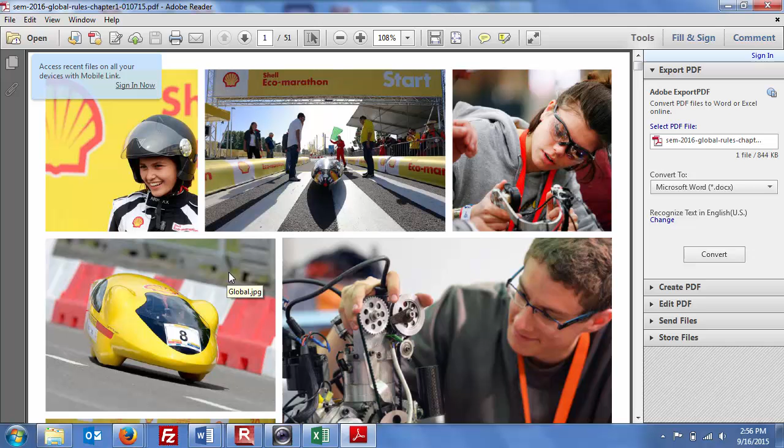So the way this typically breaks down is, obviously the car is comprised of multiple components, multiple systems, and what we typically try to do is assign a student to each component. Like someone's going to be on the drivetrain, someone else on the steering, someone on the brakes, someone on the body, someone on the frame. And that's really how any auto manufacturing facility works as well. Someone's doing the tires, someone else is doing the paint. So the rules tend to break down in a similar fashion.

So these are the global rules. These are the rules that all teams have to follow. We've not been... oh, so show me.

Yeah, so London is where the European, Asian, American champions are. So if you win the Asian or the American competition, then London is where the final competition is. So again, they're in Detroit, Michigan. Oh, pretty cool, the Philippines, in Manila. That's kind of cool.

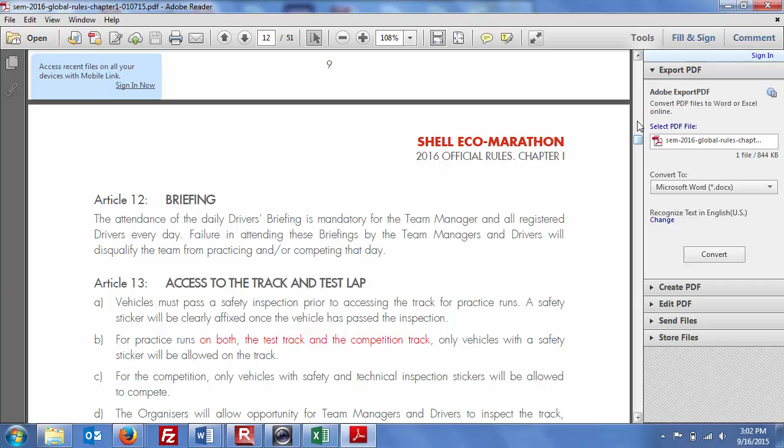All right, let's look at some of the things that can be deal breakers on this.

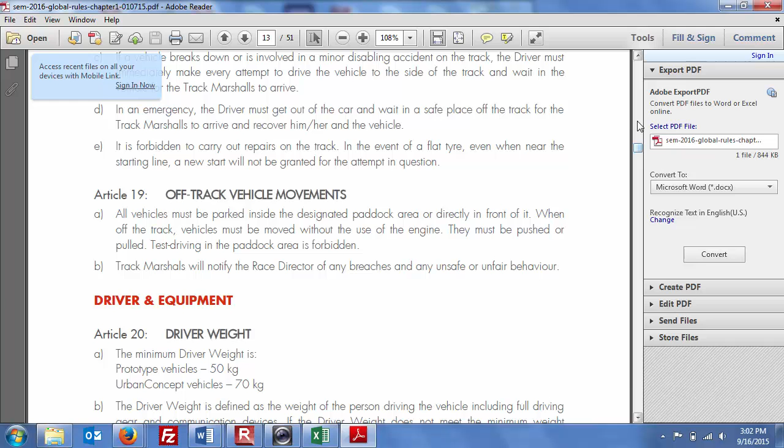So the weight of the driver obviously is an issue. A lighter person in general, like 70 kilograms. I think I weigh about 90, so I'd be kind of on the heavy side. But if you don't weigh enough, they stick a ballast in there so everyone's got at least the same driver weight.

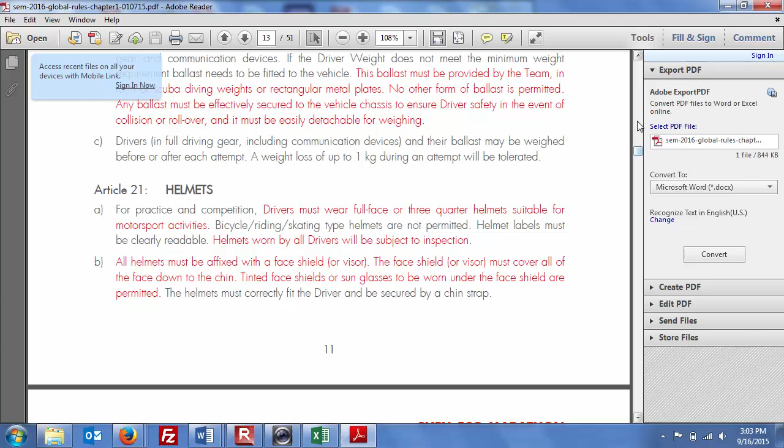So there's helmets, face shield, racing suit, driver comfort. Not as big a deal in Detroit, it's not as hot as Houston obviously, but good to stay hydrated.

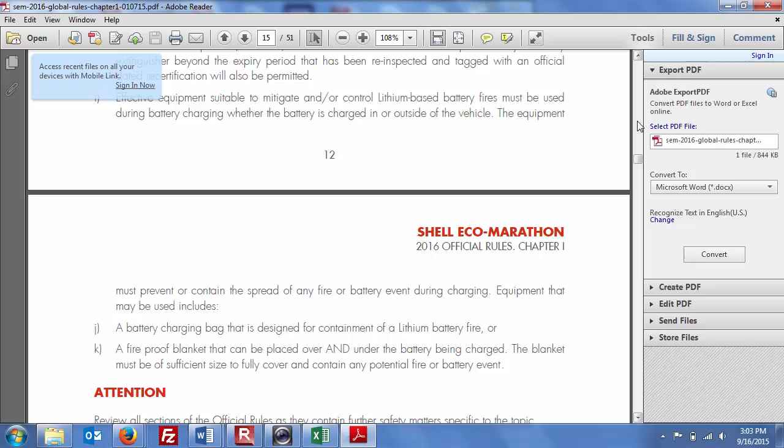Tools, materials, fire extinguisher, battery charging bag in case your lithium battery catches fire, fireproof blanket. They are really big on safety, and I don't think they've had any problems. I've seen a few wrecks, and they can be a little dramatic, but I've never witnessed an injury or heard of one.

So exactly 4 wheels, that's where we are. And we've got a 4-wheel vehicle, and the frame's actually sitting out in the bullpen. We should go check it out after class here.

Continuous contact with the road. You can't stick a sail, you can't have a sail in the car, more or less. They're pretty serious about the safety, just nothing too sharp, that's your minimum radius. And this can be a deal breaker too, having something that might look safe, but if that radius is too pointy, I don't want a spear on the vehicle either.

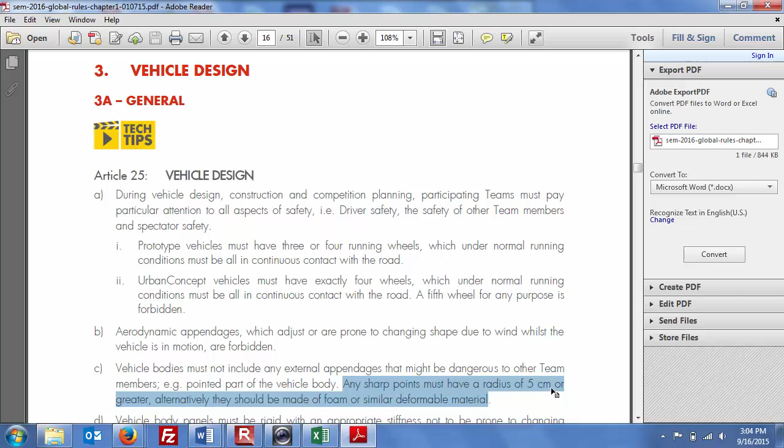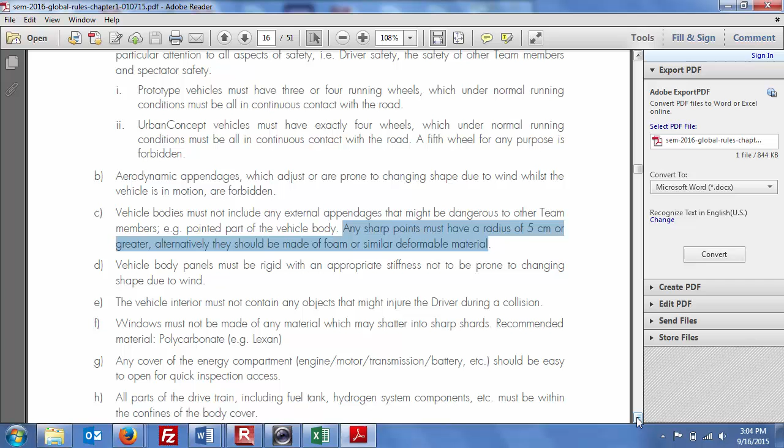Energy compartment should be easy to open. Solid floor, that's a big deal as well, fully covered. So I'm not even sure our vehicle from 2012 would qualify, it was pretty open, as you saw there.

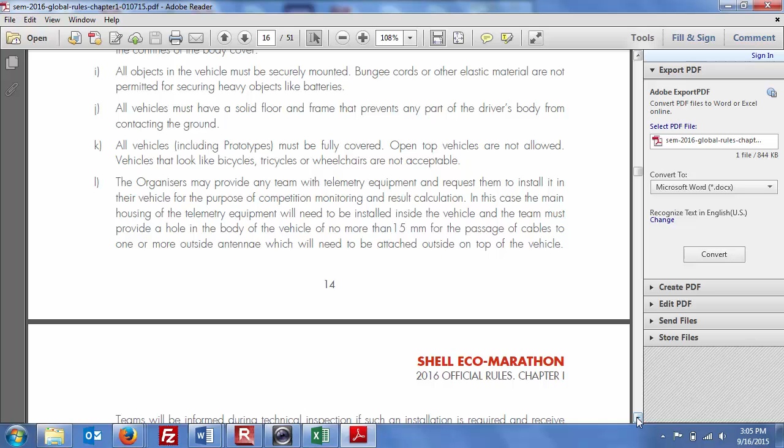The monocoque frame means that it's like a shell rather than tubing. Back in the days of bicycle building, some of the first monocoque bicycle frames came out where rather than welding tubing together, they just had a single carbon fiber frame done all in one layup, so it's just one piece rather than having any seams. That's what that is.

We do not have a monocoque design, so. Roll bar, I think we're all set for that. We should go check it out.

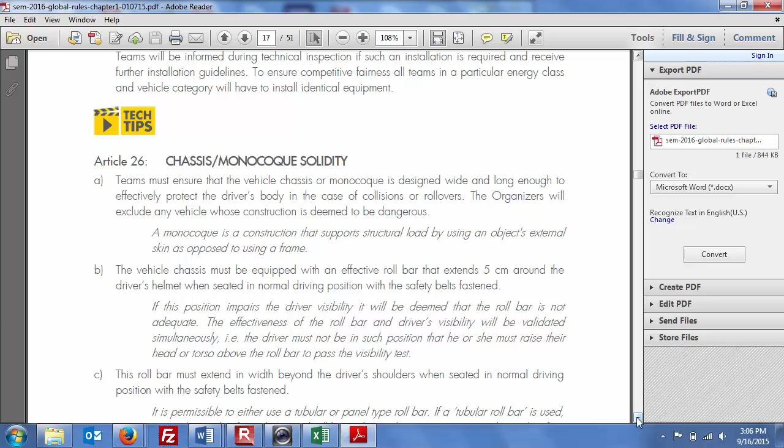Static load, 70 kilograms. They'll hang something on there to make sure the thing doesn't bend in on you.

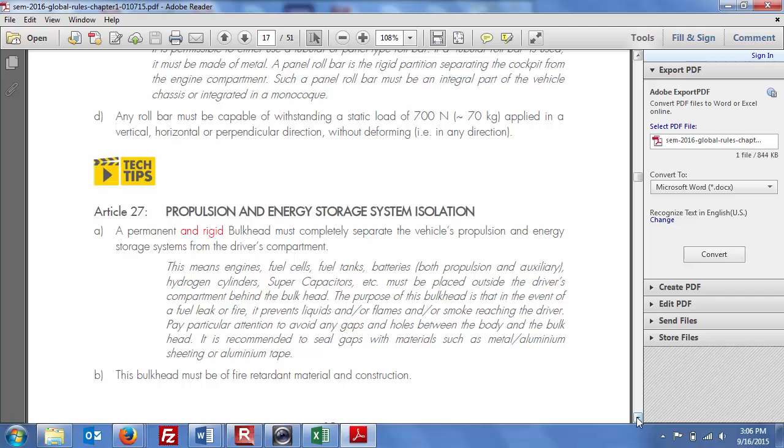This is a big deal, the bulkhead, just so that the driver is safe from the moving parts of the transmission, etc. It also has to be fire retardant.

This is a big deal too, that you can sit in there and see out easily.

And I think probably the next thing for us to do would just be to take these rules, stick them into an Excel spreadsheet, and just check them off when they're done. And if they're not, just leave them open until they are. I think that's a good verification step to do. Always update the flow chart. Yeah, exactly.

Technical inspection, weather visibility. Jake actually mentioned he would be willing to work on the windshield wipers. He put some time in on that last season, so we can hit him up for that again.

Safety harness, five-point mounting. We have a lot of this equipment already that we can cannibalize from previous cars.

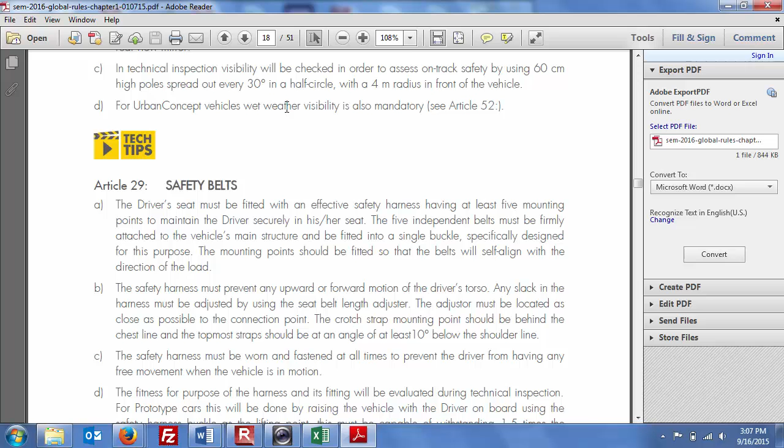Urban concept, prototype.

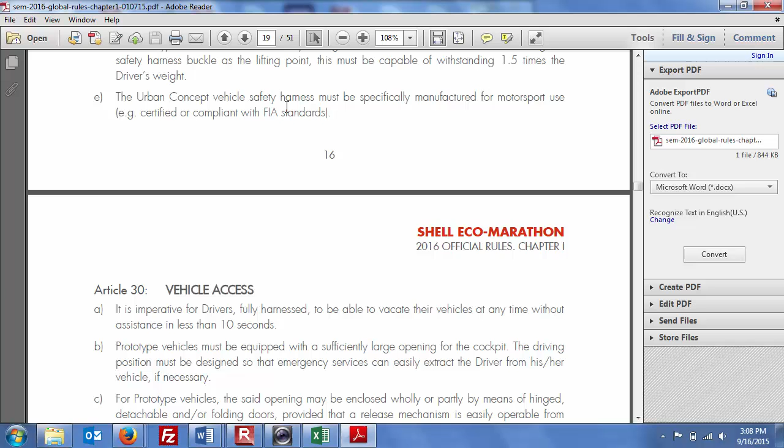Emergency services, hinged attachment—prototype's not a big deal for us. For urban concept vehicles, the opening and release mechanism must be easily, intuitively operable from the inside and outside of the vehicle. We had a pretty good set of doors last year, and we can replicate that.

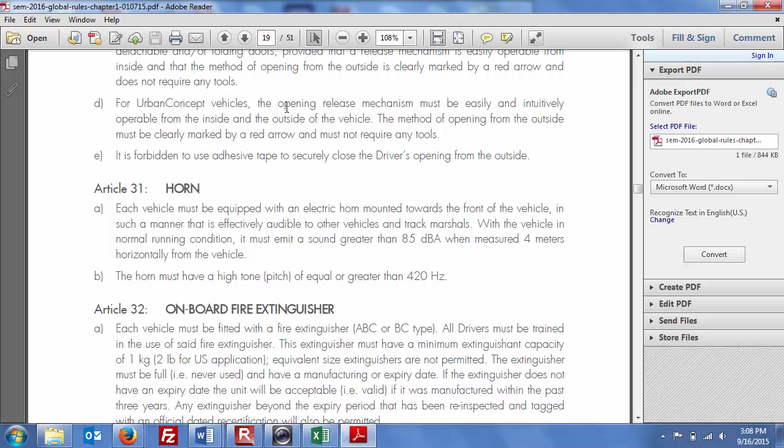Red arrow, got to have a horn, has to be loud. Onboard fire extinguisher.

Driver position: when you sit in there, you can't be squished up against the top. This does not apply to our electric vehicle, but you can't have a thing that's always moving or always running.

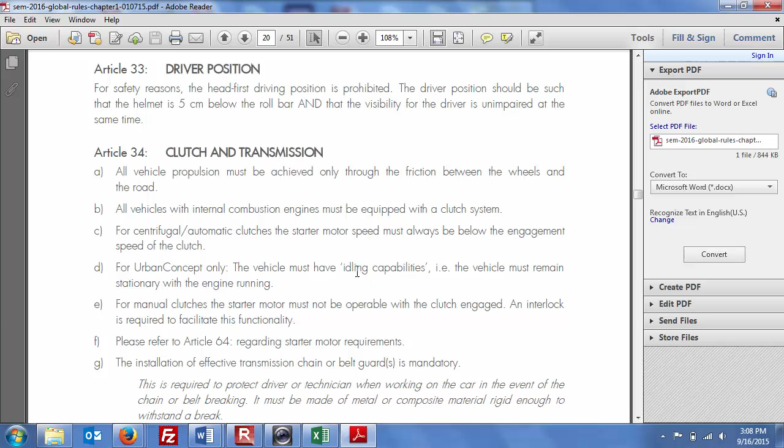That's the exhaust, not a big deal for us. You can't be too loud. There actually is a compressed natural gas category too, kind of cool.

So battery electric vehicles must provide a physical isolation with the propulsion battery from the vehicle system, like a normally open contact type.

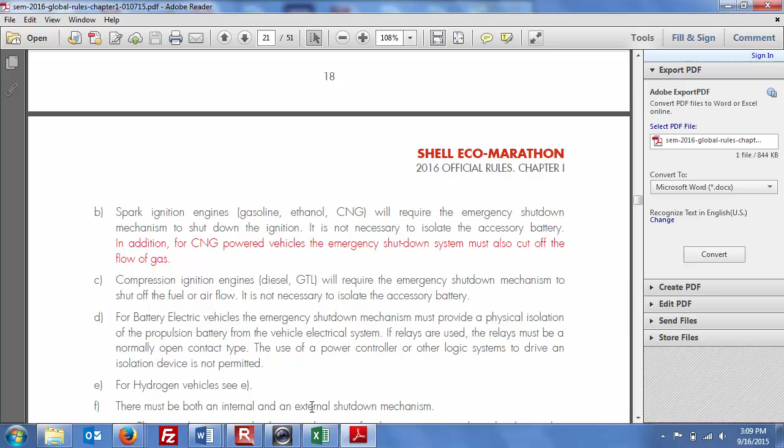Internally, so if the driver can shut it down, or if the driver is incapacitated for whatever reason, it can be shut down from the outside—again, dead man switch, directly.

So this is kind of new: it's a switch in series with the accelerator. In addition to moving the accelerator, you have to have this button on the whole time, and if you take it off, it's like a lawnmower—that little lever you might see in a lawnmower. Sometimes if you let go, the thing dies.

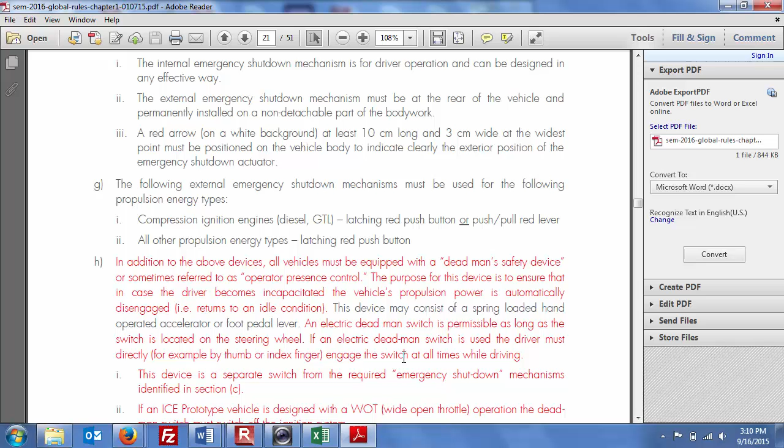Okay, so here are the dimensions—that's for prototypes, so we can just kind of skip through that.

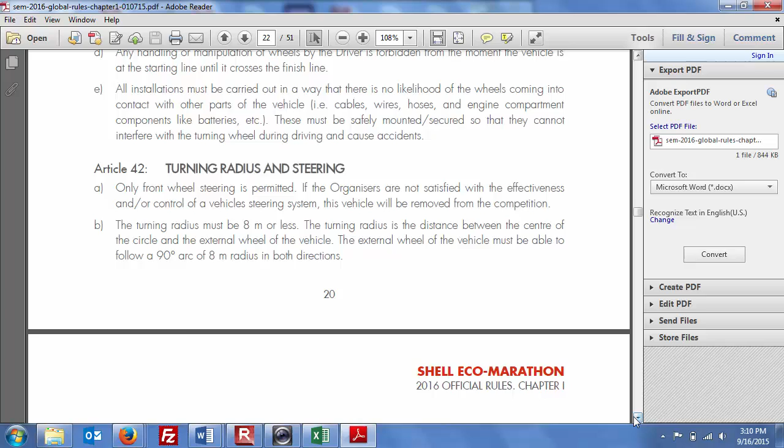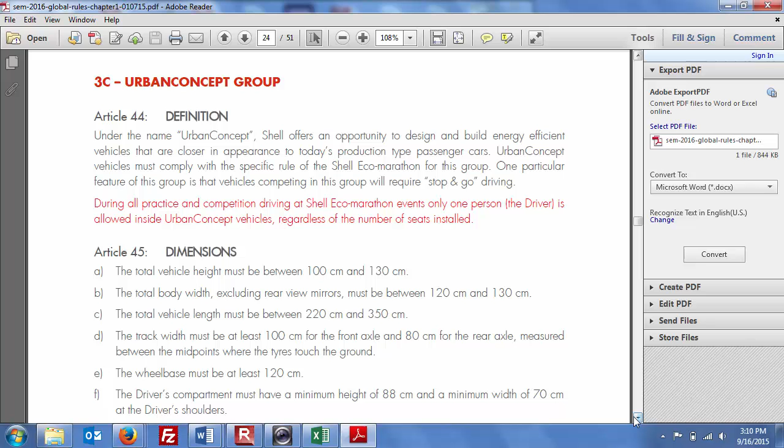Braking. Here's urban concept: you got to be at least a meter tall and not more than 1.3 meters tall. There's the width, there's the length, the track width, the wheelbase. We'll go out and make sure all of our dimensions are correct.

You can't be too low, you can't be too heavy. Just talked to Jake—he said the frame is super light. He's really impressed with it.

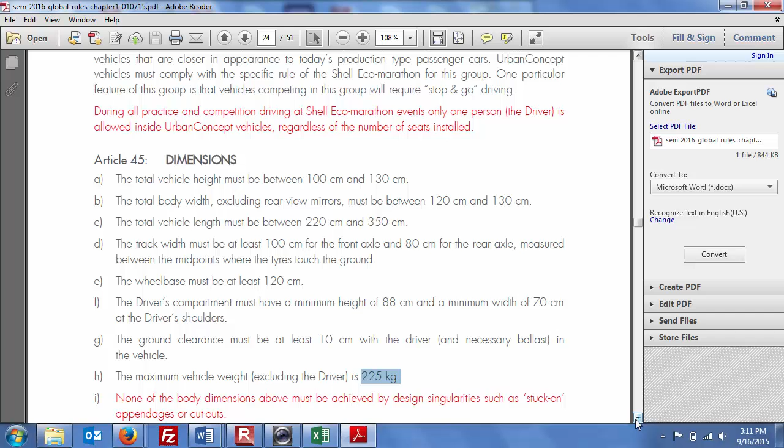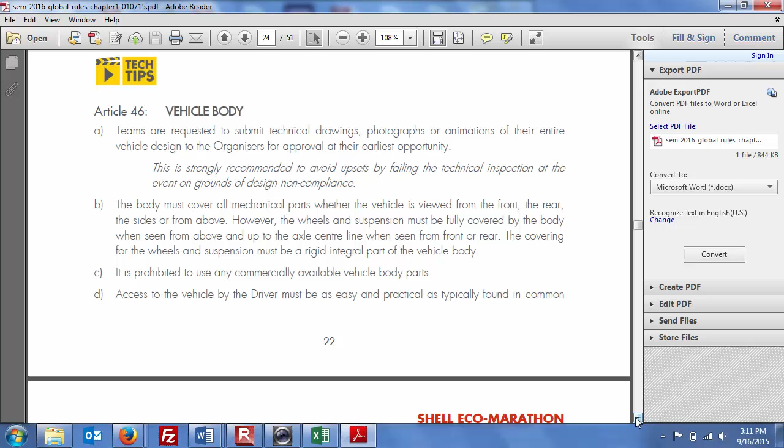Vehicle body. Windscreen with wipers, got to have a little luggage space, not too big. The luggage must be supplied and be in place—it could just be a milk jug or something like that.

Towing hook or ring, you have to have that. The wheel cannot be too large, or sorry, too small.

Turning radius 6 meters or less. That's actually pretty generous—that's a pretty big, that's 18 feet. That's turning around in a 36-foot wide road.

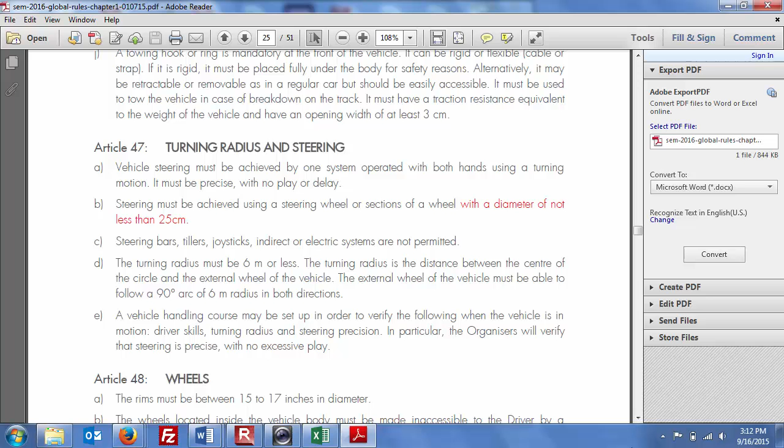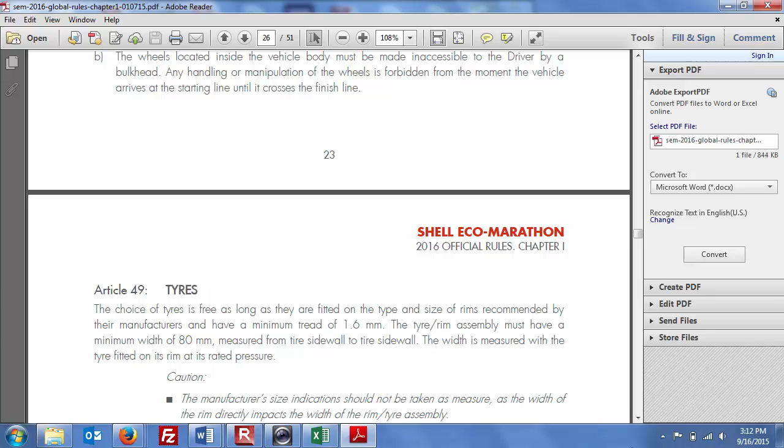The wheels cannot be too big or too small, and we do have some wheels—we have to make sure they're appropriate. Driver cannot touch the wheels. The tires have a certain dimension as well.

Lighting—this is very important too. If you fail any of these tests, you can't go on the road.

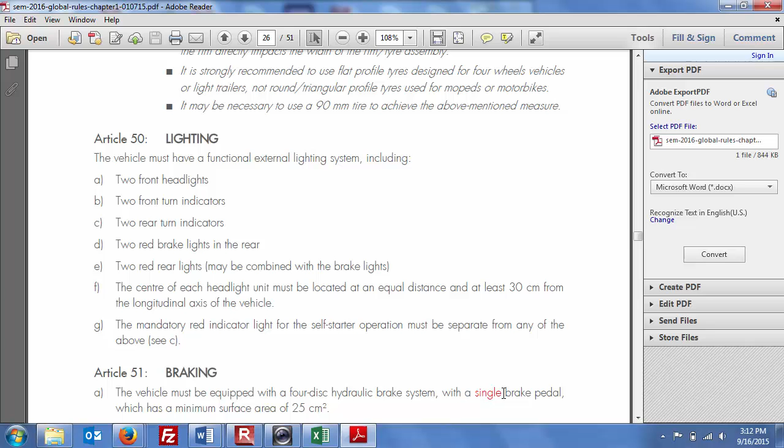Single brake pedal, you have to have 4 hydraulic disc brakes, and we do have those on hand. Master cylinder, brake system, parking brake.

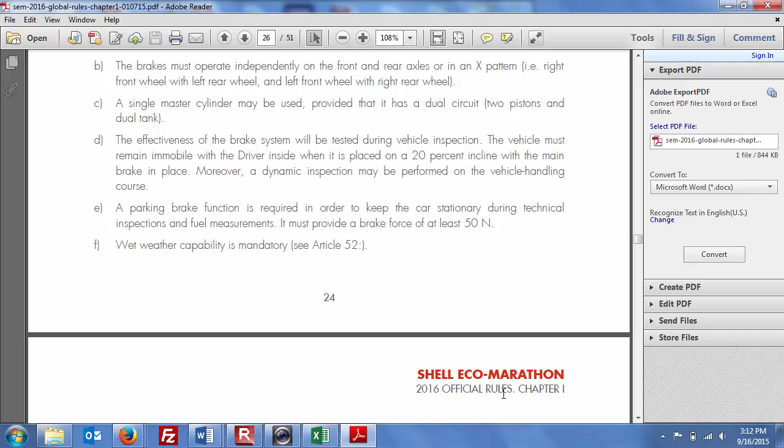So yeah, I think the next step is to get this into one spreadsheet and just start checking the boxes.

All right, so we're not doing any combustion, we're going battery electric. Maybe down the road sometime we do a hydrogen—we do have a hydrogen fuel cell, but it's big and bulky and made for stationary use. Just don't have anything of that small size, but that'd be a fun challenge down the road.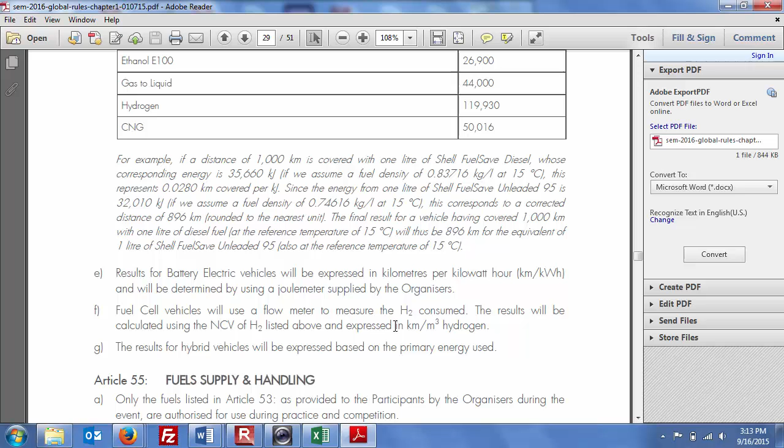So here are kilometers per kilowatt hour. I said a second ago you might do kilometers per megajoule, but you can just do the same conversion there. And the joule meter is provided, as I mentioned before. In the case of hydrogen, they're using flow cell meters or flow meters.

48 volts, that's where we are. More voltage is better for getting off the line quicker, a little more torque, starting torque in general.

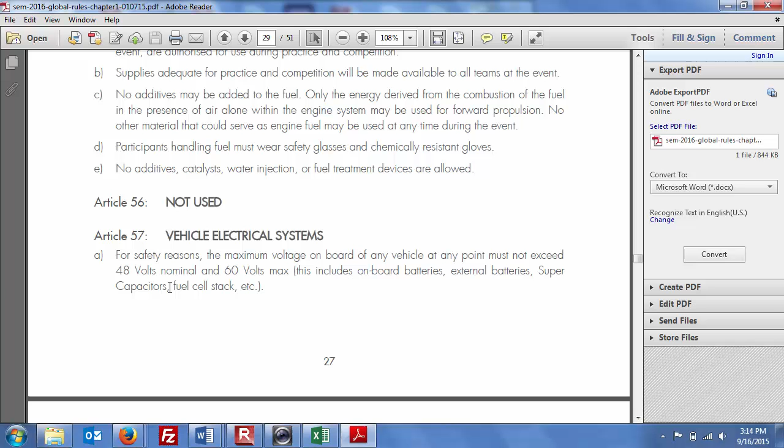We are allowed to use capacitors as well. I think one of the students mentioned he might have some capacitors we could use. We do have 2 different sets of lithium-ion batteries that we can use as well, and a battery management system.

And we'll get into this in more detail. Metal tray is required—I think we had something wooden last time, but obviously have to go with metal.

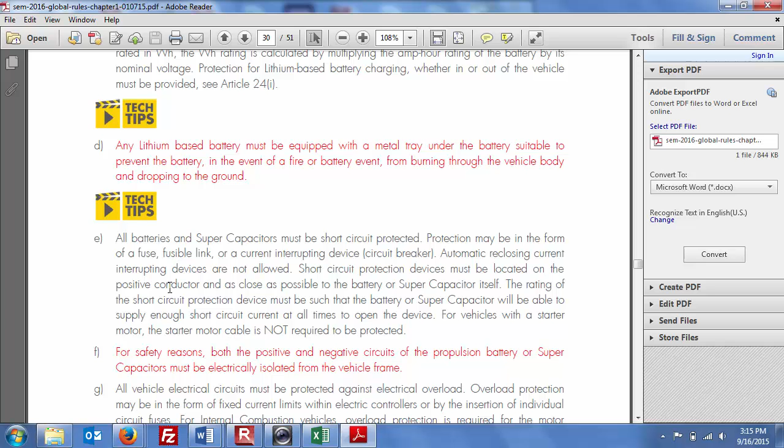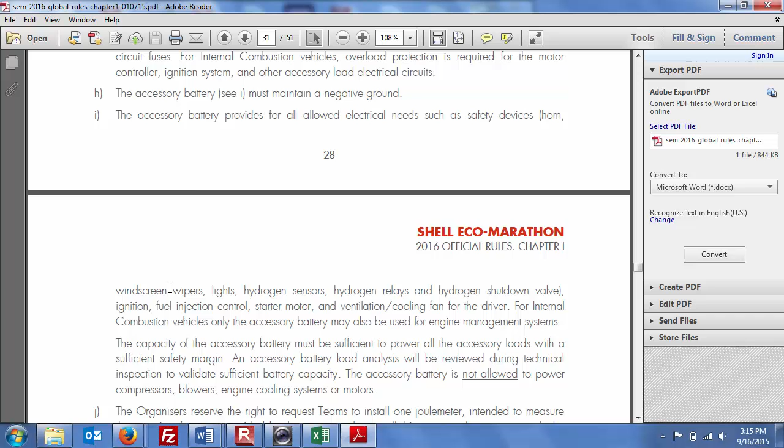We'll need to get, and we do have a good start on our technical documents. We've got last year's report that's pretty far along that we can buff out and put in.

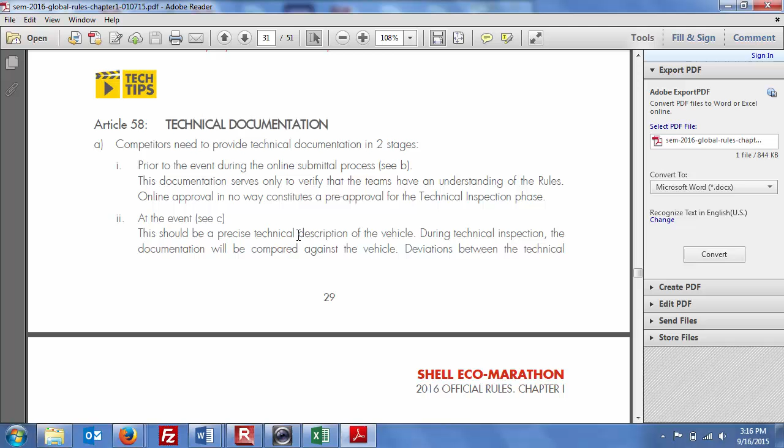And this is how energy flows through the car—battery electric. This is going to be our main electrical wiring diagram, and I think Colton had a really good start on that, so we can just use that and go from there.

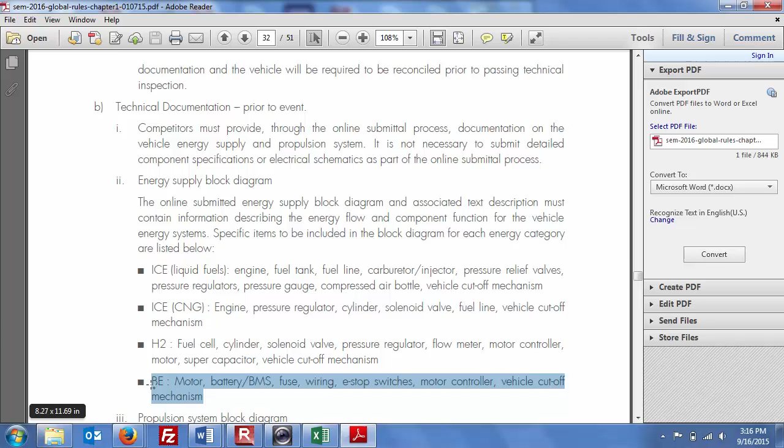Same thing on the propulsion block diagram, how energy flows through the system. Battery electric, so we need each of these separate wiring diagrams—not a big deal.

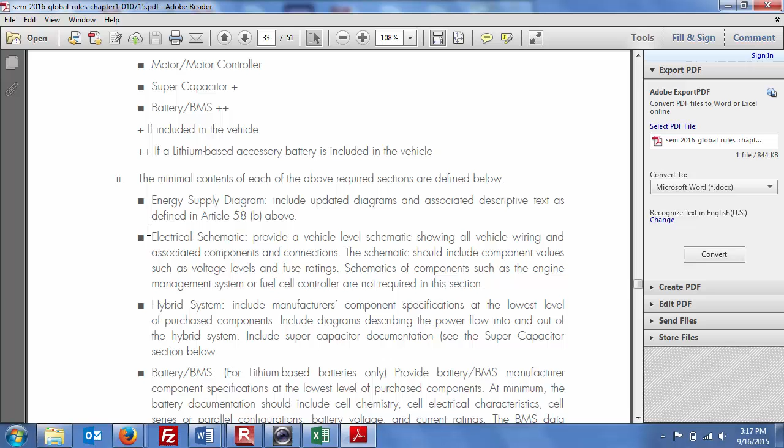I have to just provide all the specs on what we have for the batteries and the battery management system. Fuel cells, supercapacitors, motor controllers.

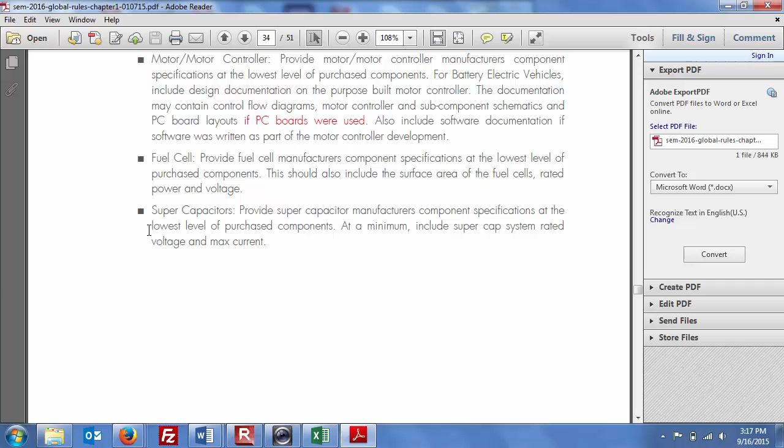Okay, so this internal combustion does not apply to us. Fuel tanks does not, fuel system does not. Hybrid technology - we have not really decided whether or not we're going to use a capacitor. Like I said, one of the team members for this year said he has access to these, and it might turn out to be to our advantage.

You cannot store energy mechanically or hydraulically, only electrically. And so if you're storing... well, I guess a capacitor in addition to the battery would be your stored energy, obviously, because you have to start with the battery on board.

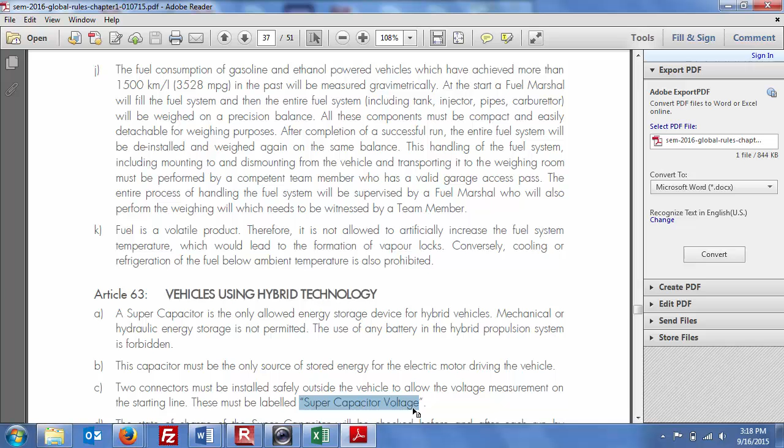Oh, and I think they want you to label this too, because the capacitor obviously can discharge much more quickly than a battery, so you can get a much bigger zap in a hurry from a capacitor than you could from a battery potentially.

And they want to make sure that the supercapacitor is not charged at the beginning of the race. It's just for on-board running time storage and maintenance.

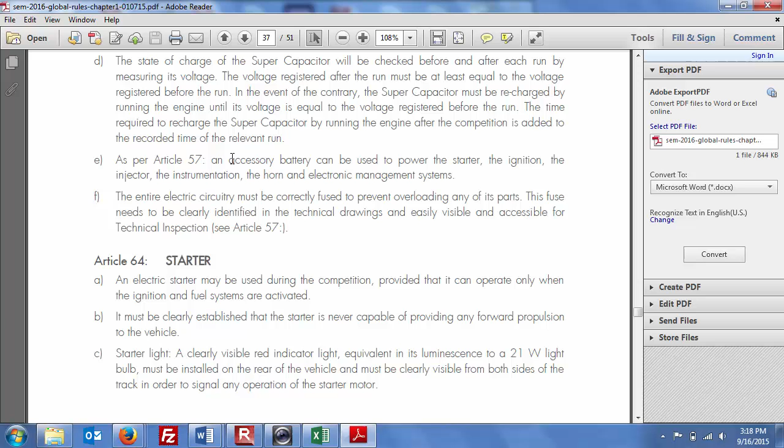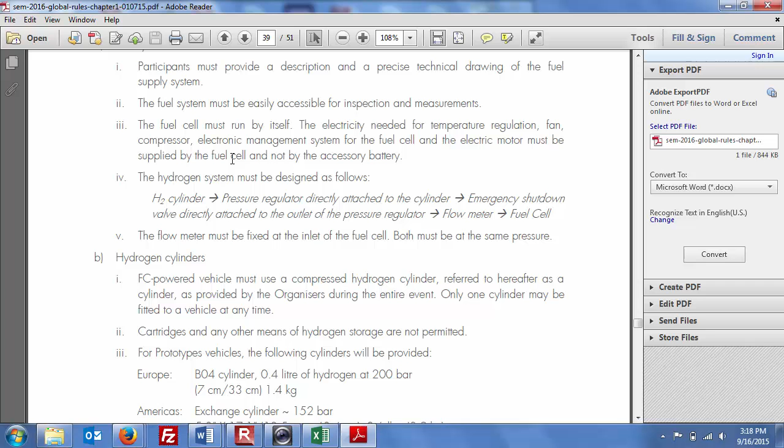Starter, it's for ignition, electric propulsion, fuel cells, hydrogen cylinders, ventilation, hydrogen detector.

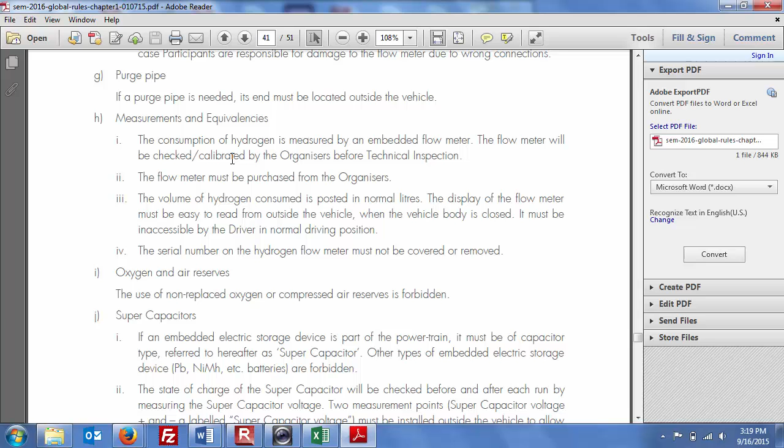Wiring clearly distinguished - this is a pretty big deal, making sure that the wiring is neat. We've always done a pretty good job with that in the past. You've got your propulsion power and your accessory power, and obviously a lot more juice flowing through the propulsion than the accessories.

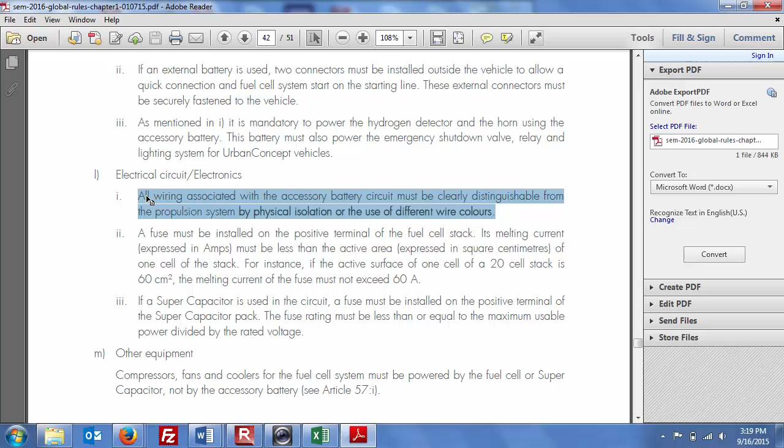Fuse. Different colored zip ties - yeah, different colored zip ties would be fine too.

You can have up to 2 electric motors. We've got multiple motors, we've gone through a bunch of different iterations. It's amazing how hard it is to find a motor of the appropriate size and RPMs, but we do have a good selection.

Modifications - okay, so the motor controller must be purpose-built for the Shell Eco Marathon, and this is a tough one. The electric motors may be purchased or purpose-built, but the motor controller must be. So we have to build our own motor controller.

There's been a few cases in the past where if a team buys a motor controller and does a slight modification to it, they allowed it. But this is the new deal - that's not allowable anymore. So we'll just have to see where we are.

That's going to be one of our more challenging builds. So motor controllers built from subcomponents - here's an opportunity for a little bit of reverse engineering, because we do have a couple purchased motor controllers, and it's basically going to come down to seeing what's in there and then more or less recreating it. Probably not as sophisticated as a commercial one, but if you're using other subcomponents, then it's fine.

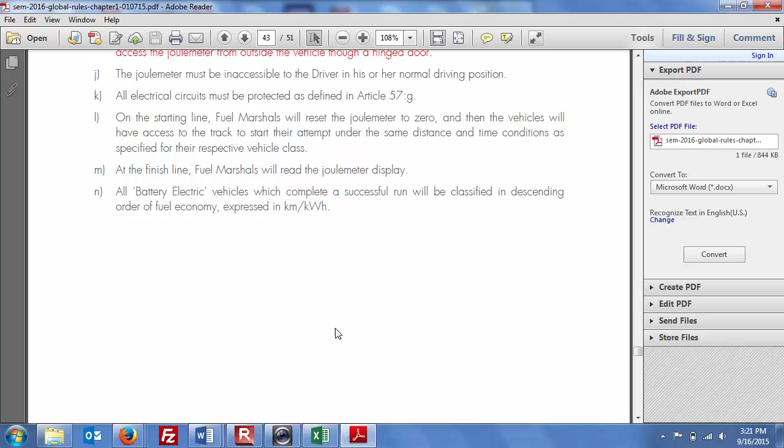Here's where the joule meter goes for measuring energy. Electrical circuits protected, starting line, finishing line, fuel marshals.

Internal combustion, that's not us. Methane detector, methane, no.

Okay, so there's a little bit of money involved if you win. Prize money, trophy, onstage winner ceremony.

Natural gas - so battery electric, same deal. If you win, there's $2,000. Oh, and even third place gets $500.

Off track - we've done this in the past too. It's kind of nice to participate in this, and it works in well with the curriculum. It's just a little bit of write-up on the philosophy of the event.

Safety would be nice, perseverance and spirit would be nice, since we've competed this before. Okay, so we won't go through all this, we can kind of deal with that later.

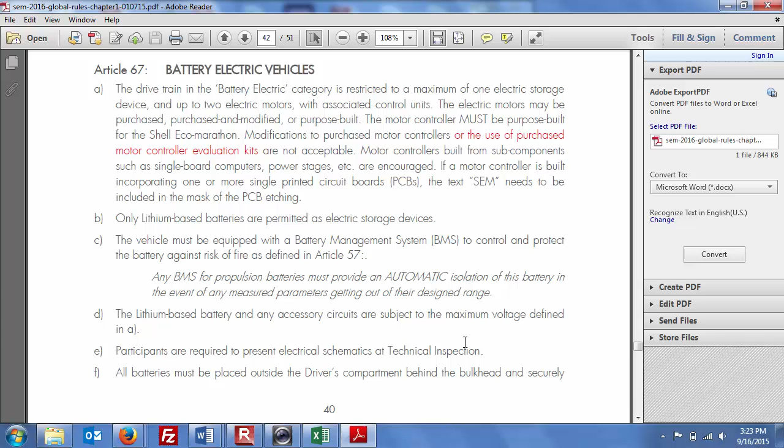But okay, so there's kind of a big, broad overview of the race, and obviously we kind of hurried through the rules. But I think the next thing to do as a team would be to break down every one of these sublines in Microsoft Word or Excel, for example. Cut out the stuff we don't need, keep the stuff we do for our car, and then just go down and use it like a checklist for where we are on each thing.

All right, well that's it. So I'll wrap up that little chunk - that was almost an hour I just went for. I guess we've been here for about an hour and a half. We'll just spend another 20, 30 minutes going over where we are with the car right now and seeing what you guys are interested in.